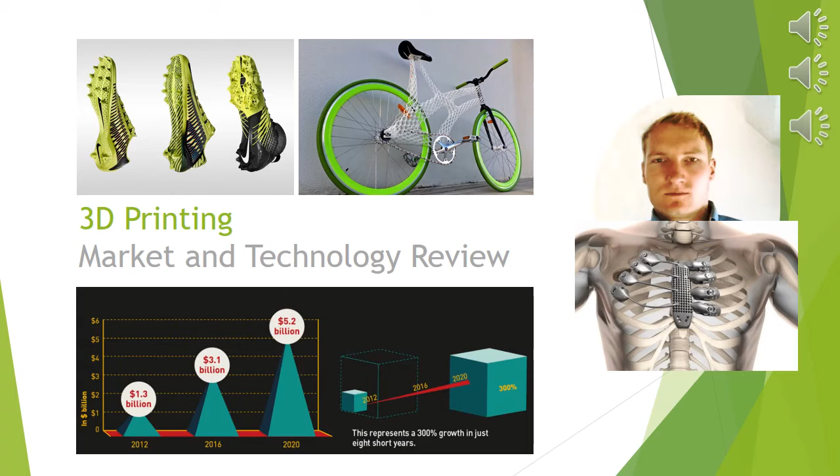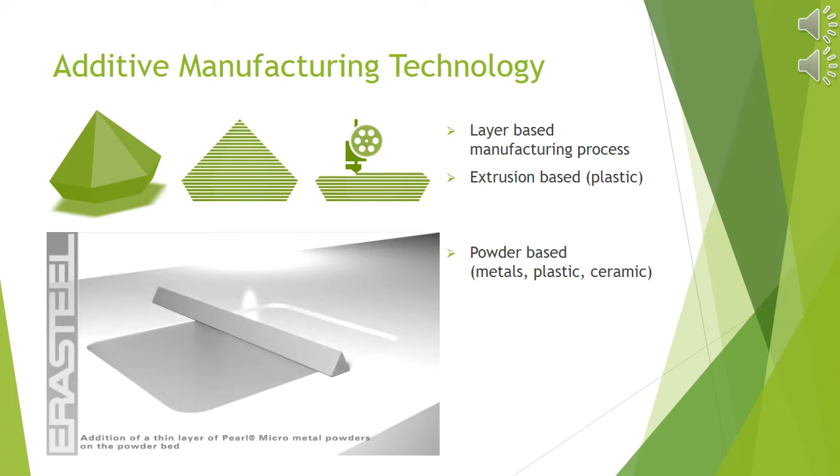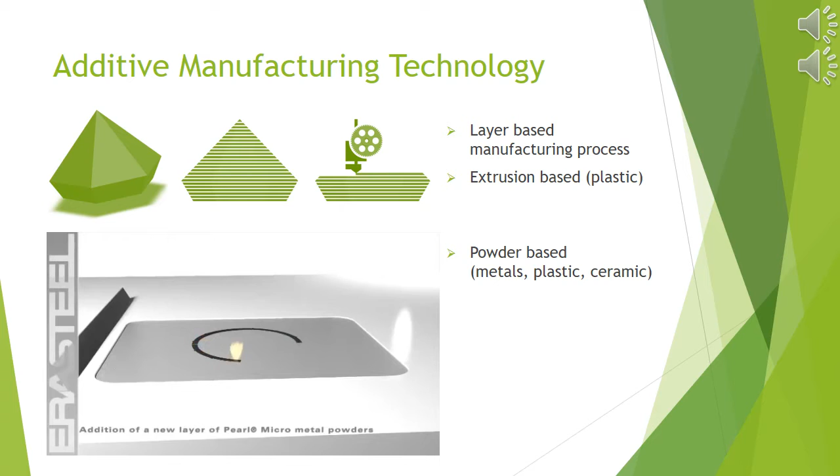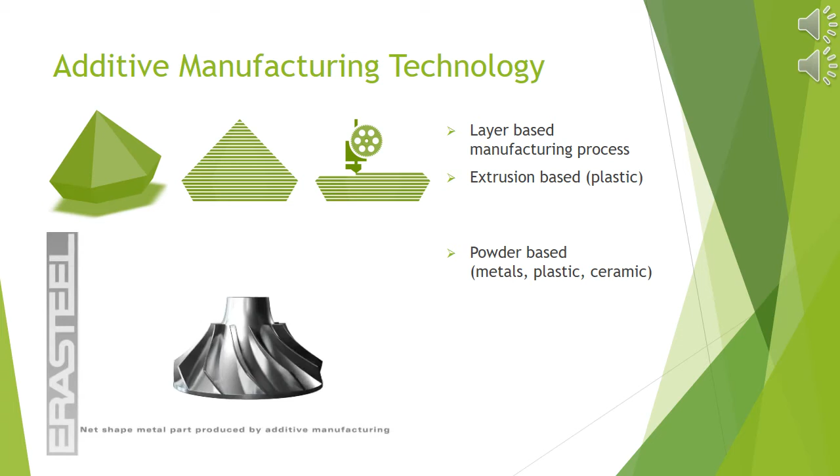In the lower part, you can see an advanced industrial powder-based technology, so-called selective laser melting. Here a laser is melting the top layer of the powder according to the actual cross-section of the CAD model for this layer. And after the laser has finished one cross-section, the powder bed is lowered according to the height of one layer, and the recoater plate is dispensing a fresh new layer of metal powder.

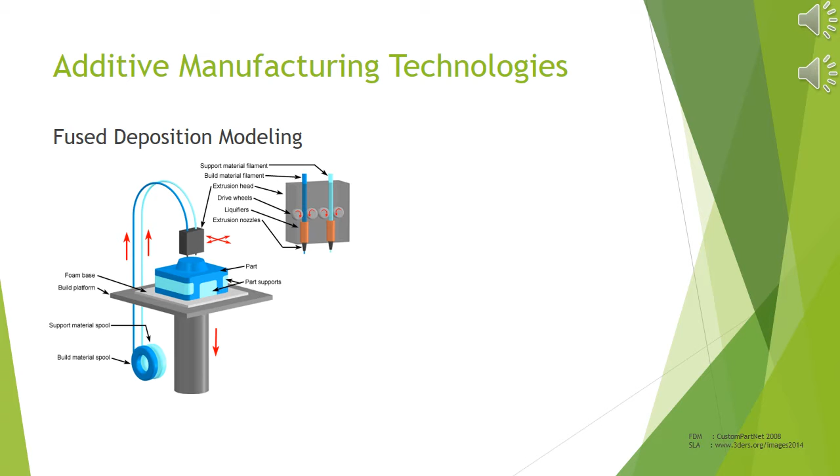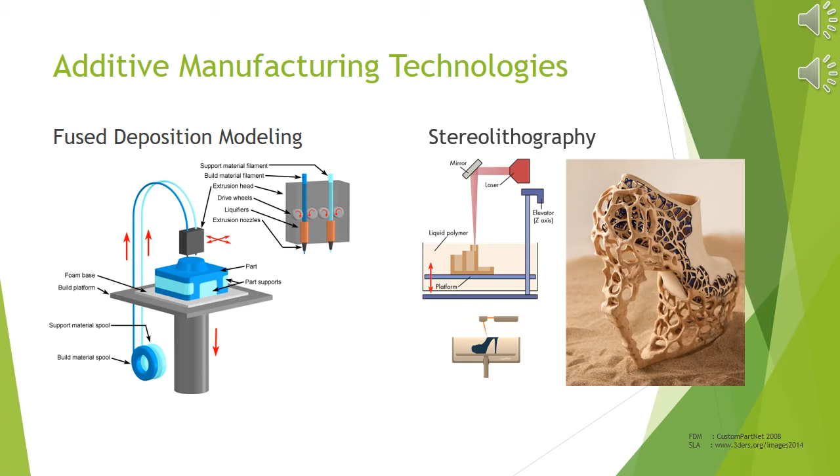On the right side you see the first patented AM technology from the year 1984. It's the so-called stereolithography, where a UV laser is hardening a light-sensitive liquid resin in a tank layer by layer.

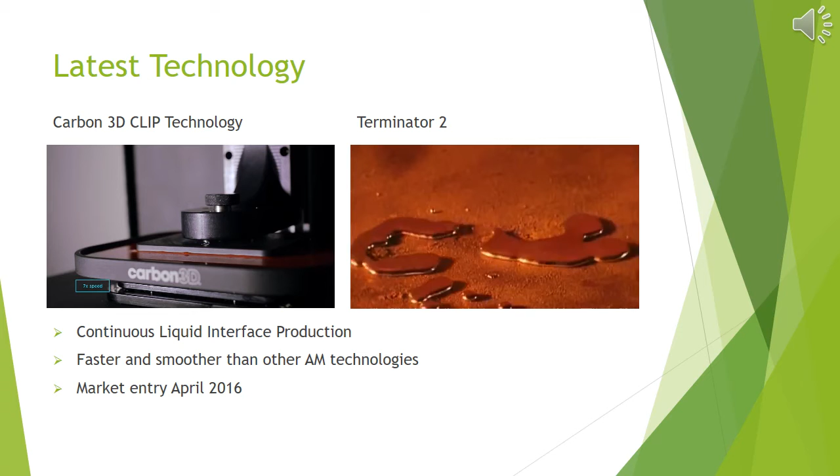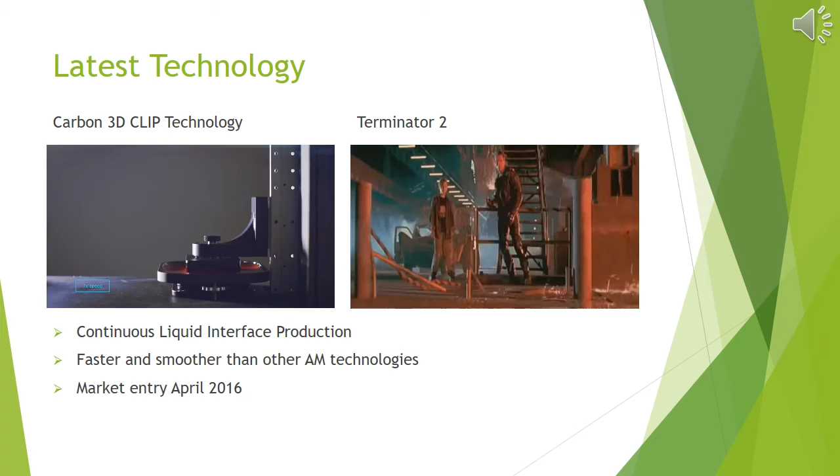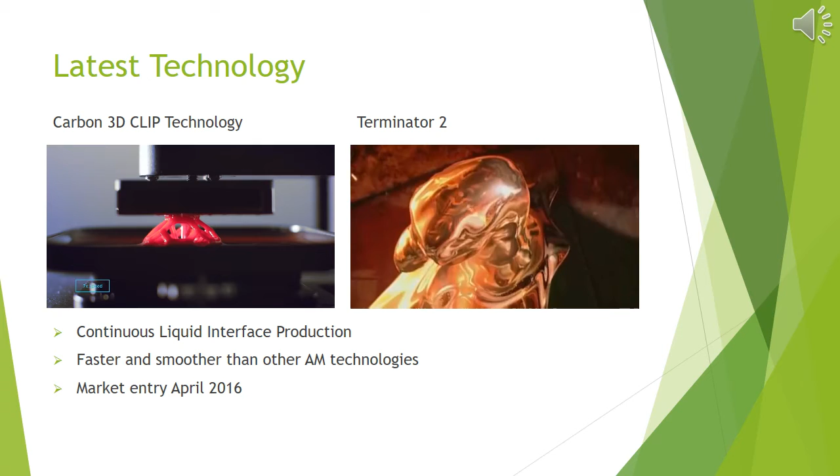The latest technology, which entered the market in April 2016, is the so-called continuous liquid interface production, which kind of reminds me of a futuristic scene from Terminator 2. Here the UV light is projected from the bottom of the tank as full cross-sectional images, while the build part is constantly moved upwards. And the continuous build process leads to a faster process with smoother surfaces. But I explain this and a couple of other interesting technologies more detailed in my paper.

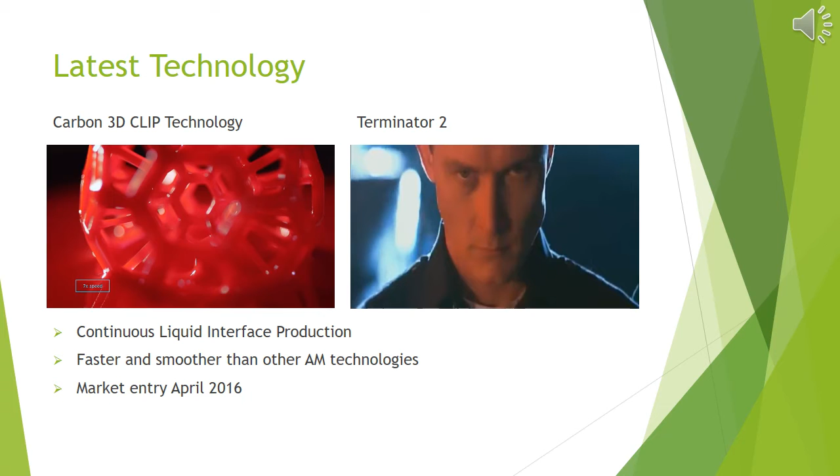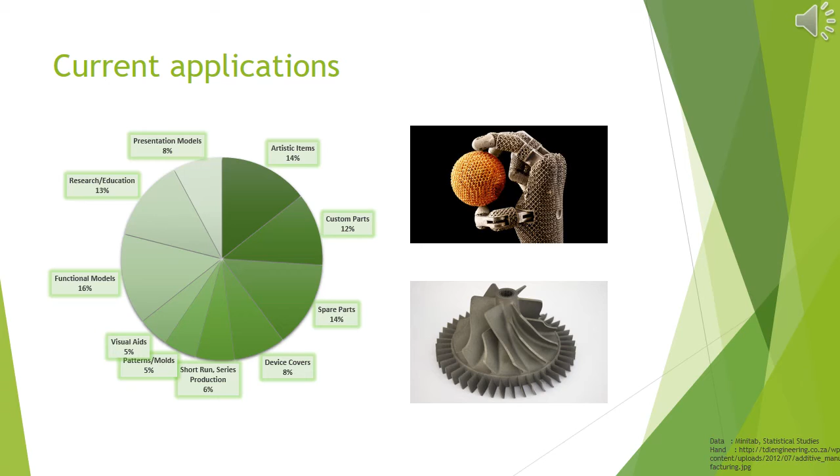The applications for AM technologies are broadly spread. It ranges from spare parts and customized parts in the aerospace industry to functional or visual models in the automotive industry. And other big applications for 3D printing are for demonstration issues in educational institutions or to generate artistic items.

The drivers for the market evolvement are that we have no limitations of design in contrast to traditional manufacturing methodologies. And we have mass customization and reduced lead time because we can simply adjust the virtual model and reprint it instead of creating a new mold first like in traditional technologies, which can take weeks.

And we don't need additional tools, or we can just print new tools if we want. And also we don't need stocks anymore for spare parts because we can just print them on demand from the virtual file.

And finally, the biggest market driver in the low-end sector is that after 20 years of the first patent, we have a lot of patents expiring, which leads to a more competitive market and an explosion for low-end solutions.

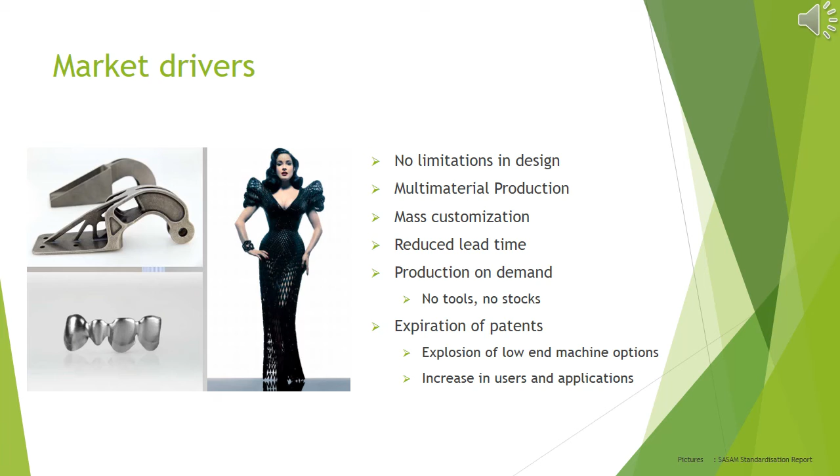In my paper, I further did a SWOT analysis. The strengths are mostly covered with the market drivers from the previous slide. And the first weakness of the additive manufacturing technology is that it is a rather new technology, which means that it suffers from a lack of standards in technology and materials. Further on, some of the technologies still have accuracy and repeatability problems.

However, one of the opportunities is the outstanding research effort in material science and engineering to expedite the improvement of those technologies. And another opportunity is the combination with traditional manufacturing methods in hybrid processes. And a completely new business model opportunity can be found in the production by demand on location.

Threats for the 3D printing technologies are that we also face superb advances in virtual reality systems, which make physical 3D models redundant and maybe unnecessary in the future. And for the manufacturing, we also have advancements in competitive traditional technologies like CNC machining.

As promised, I have some more figures for the market with thanks to statista.com. The total number of 3D printers sold more than doubled from 2015 to 2016, from around 200,000 to almost 500,000 printers. And the estimation for units sold is rapidly growing to 6.7 million units totally sold in the year 2020, which means that the number almost doubles every year.